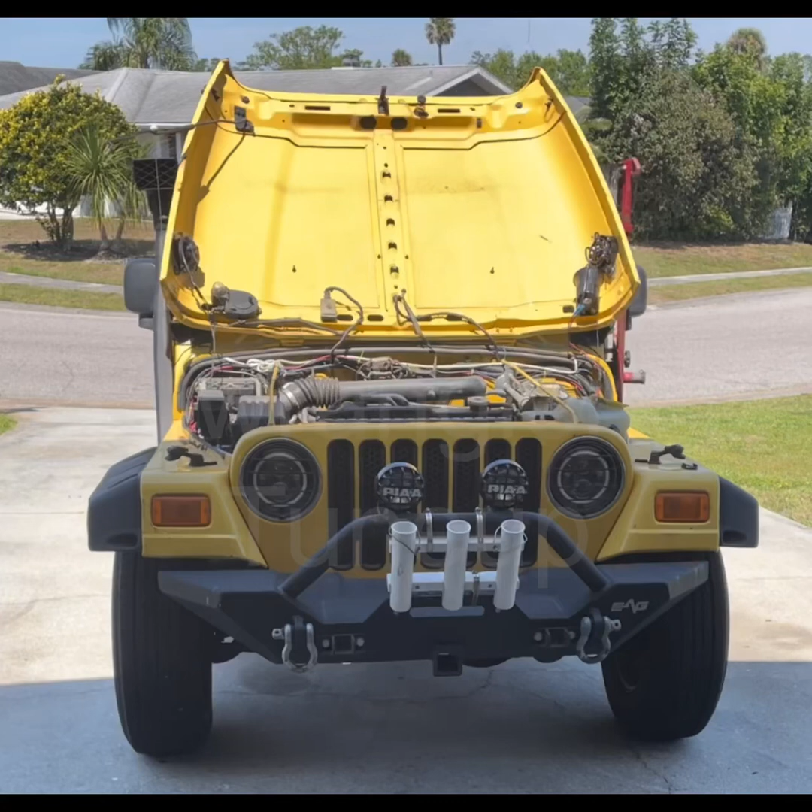Hey kids, how about we give the Jeep a tune-up today? My Jeep's a 2004 Jeep Wrangler. It's got the 4-liter inline 6. So we're gonna give it a tune-up. It's been running a little bit rough. It's been having some issues when it's hot.

When it's a hot temperature and I stop, run into the store, do something, and come back out, it starts real rough and coughs and spits and misfires. And I've done some research on the YouTube and whatnot, and apparently the primary issue is this. So as you can see here,

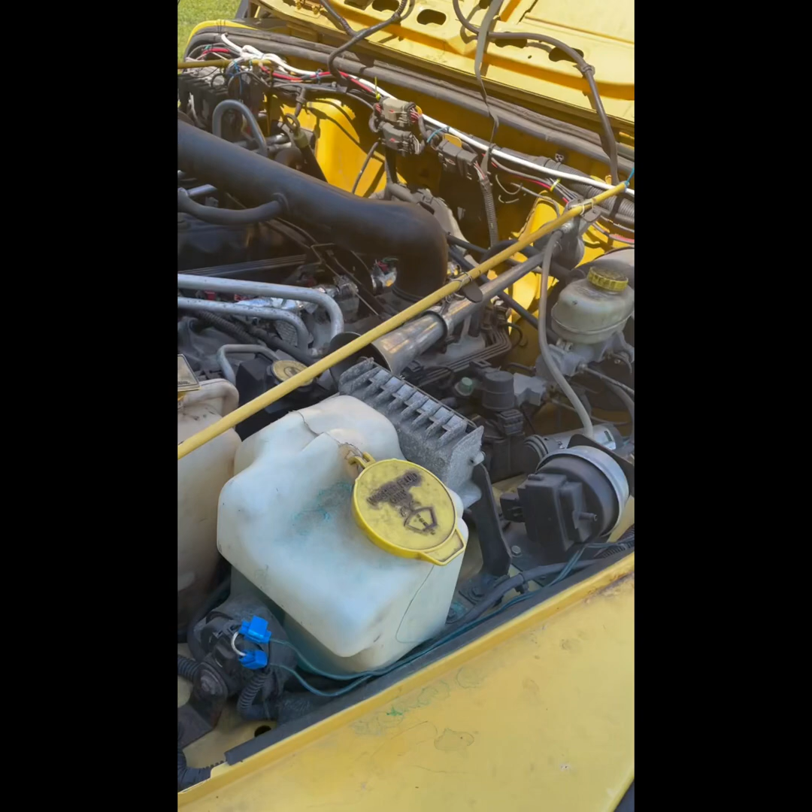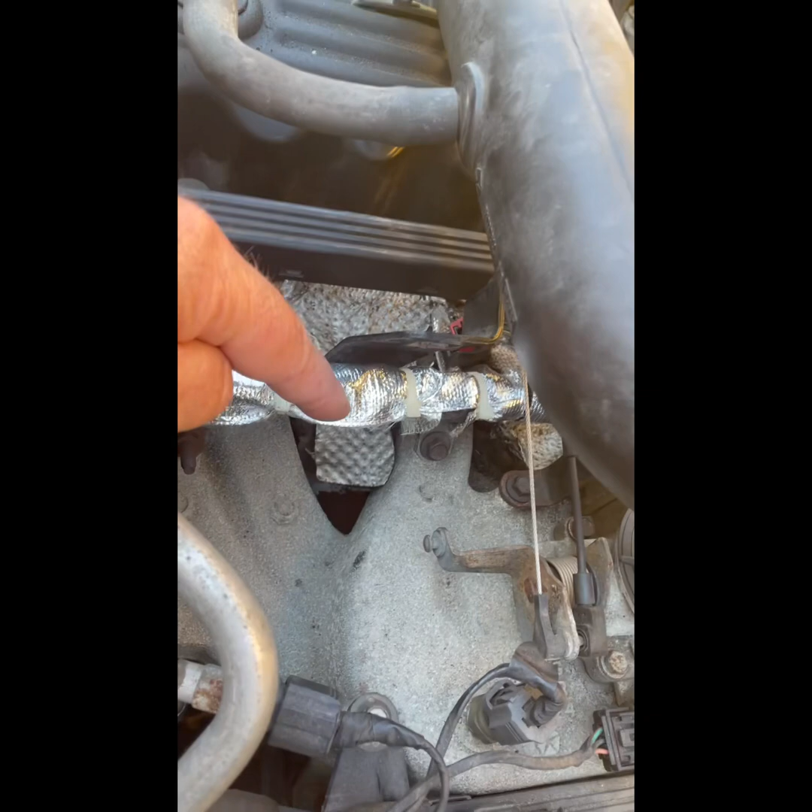this right here is your fuel rail, right? Runs fuel to each of the individual injectors. This is an injector here, and here, here, and there. These are all the injectors. Well, this is your exhaust manifold. Your exhaust manifold right here next to 3 and 4

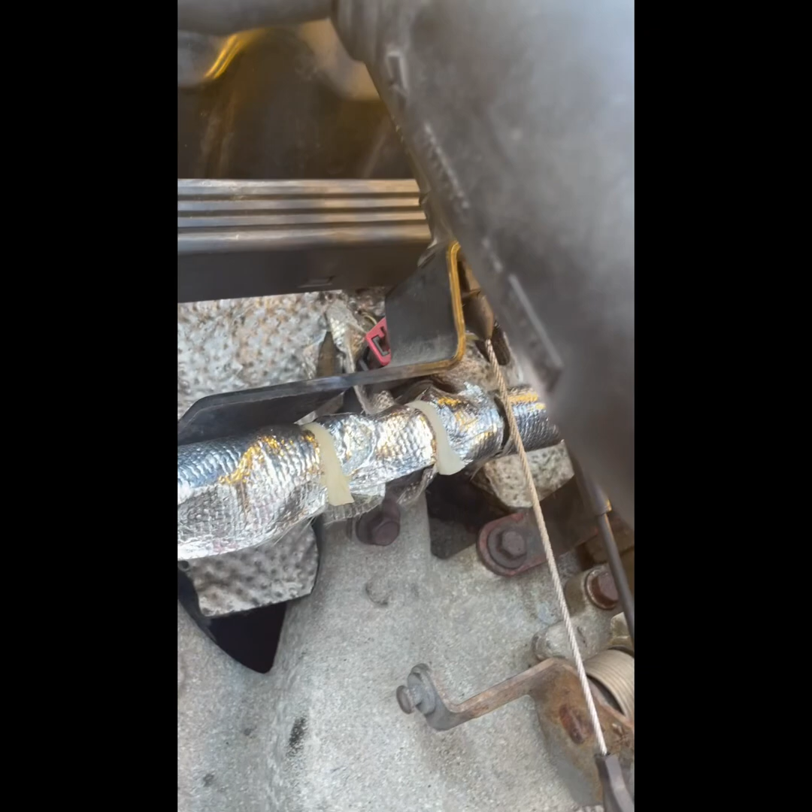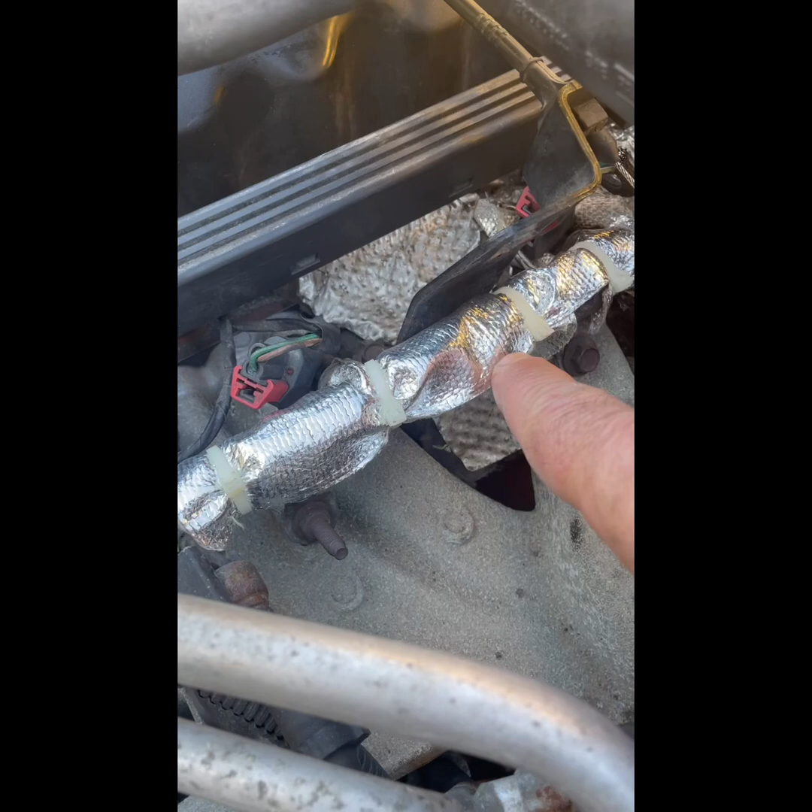are so wrapped around the exhaust manifold that it causes the fuel to vaporize while it's sitting in a parking lot. And what I've tried to do here recently is I bought this heat shielding, and it seems to be working pretty good. This is the original factory heat shielding, this little cheesy foil concoction that's just worthless.

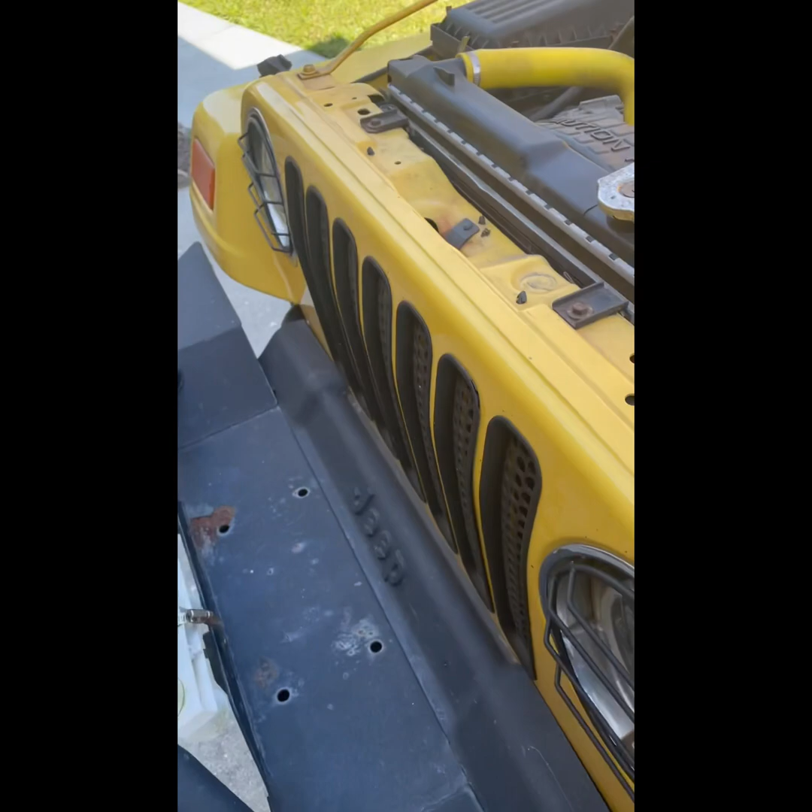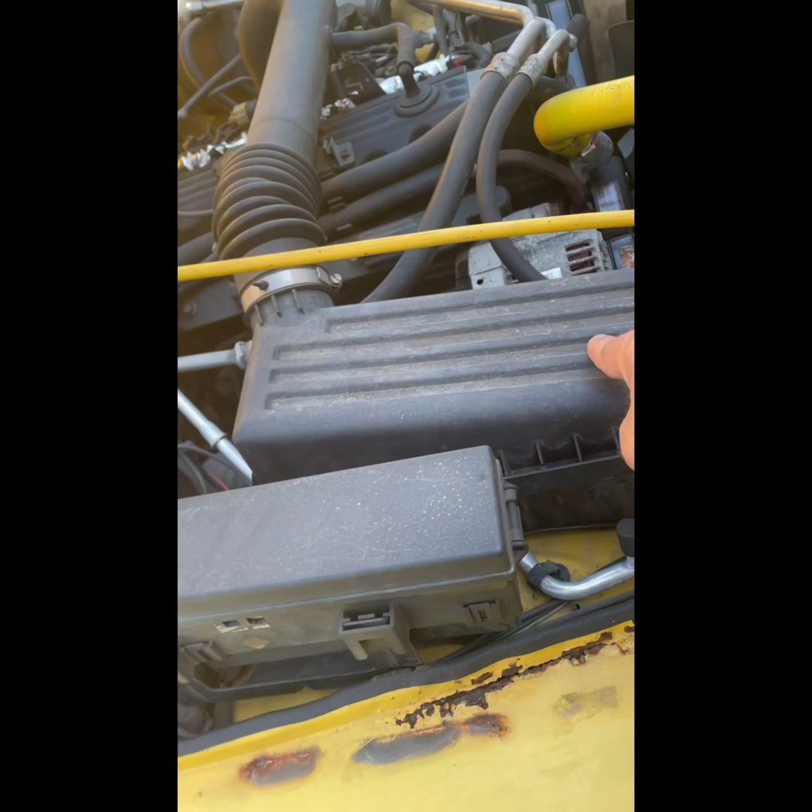So, like I said, we're gonna give it a tune-up. We're gonna be taking this guy here out. This is the ignition coil. We're gonna take that out. We're gonna replace that, and then underneath that are the spark plugs. We're gonna replace those. We're also gonna clean out our air filter. We have a lifetime air filter that just needs to be washed and cleaned. We're gonna clean the engine bay out and basically give the old Jeep a spa day.

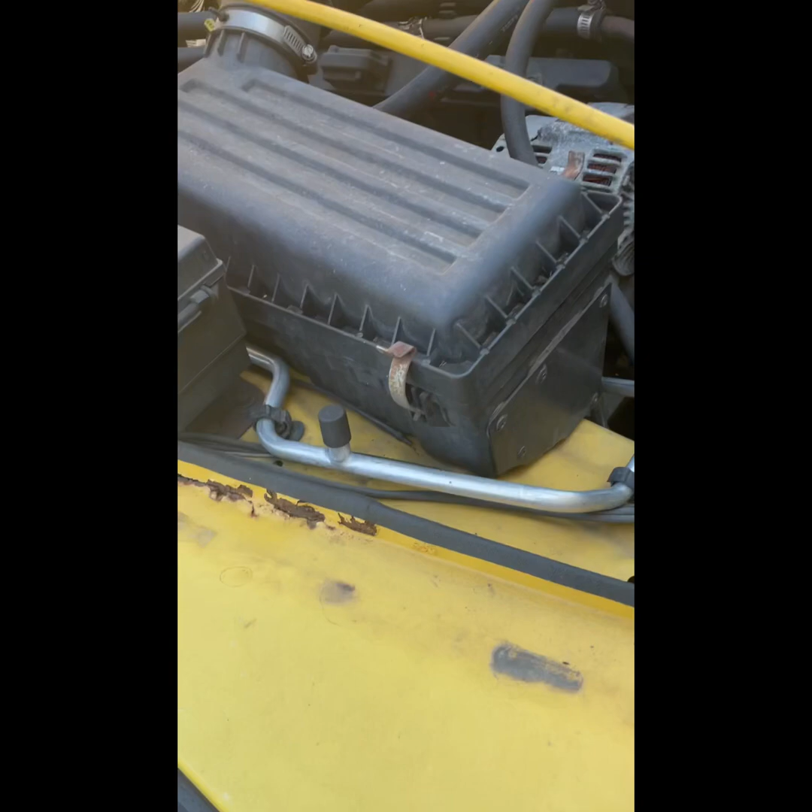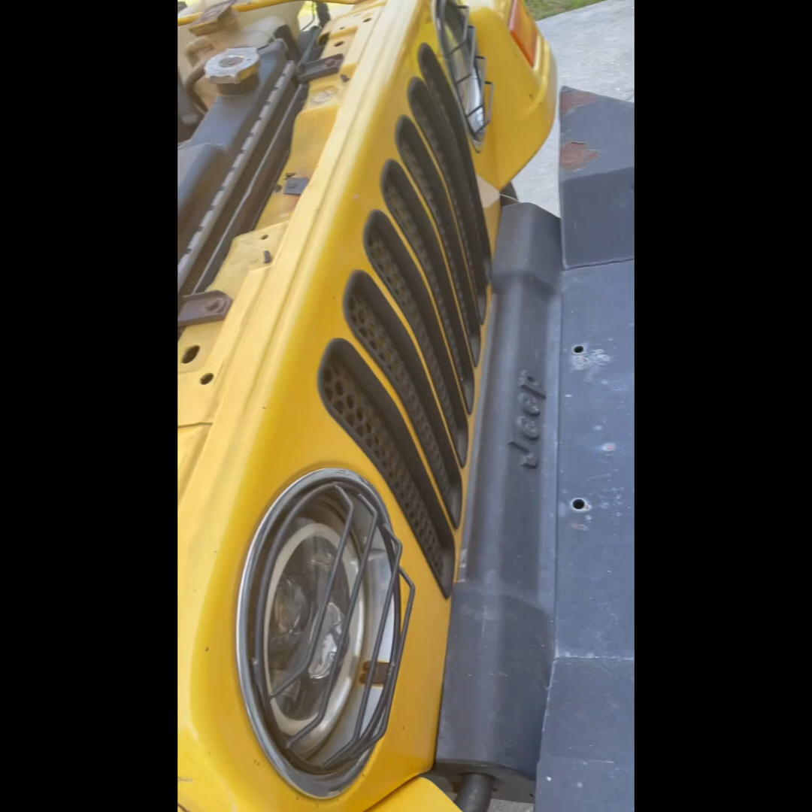Yeah, I've got some cancer here I gotta deal with, but it was there when I bought it. This Jeep originally lived in Boston, up in Boston. And so they like to use salt on their roads, so there's a little bit of cancer up in here. There's some more over here that I need to deal with. Right here under the passenger door. I gotta deal with that, but that's another episode.

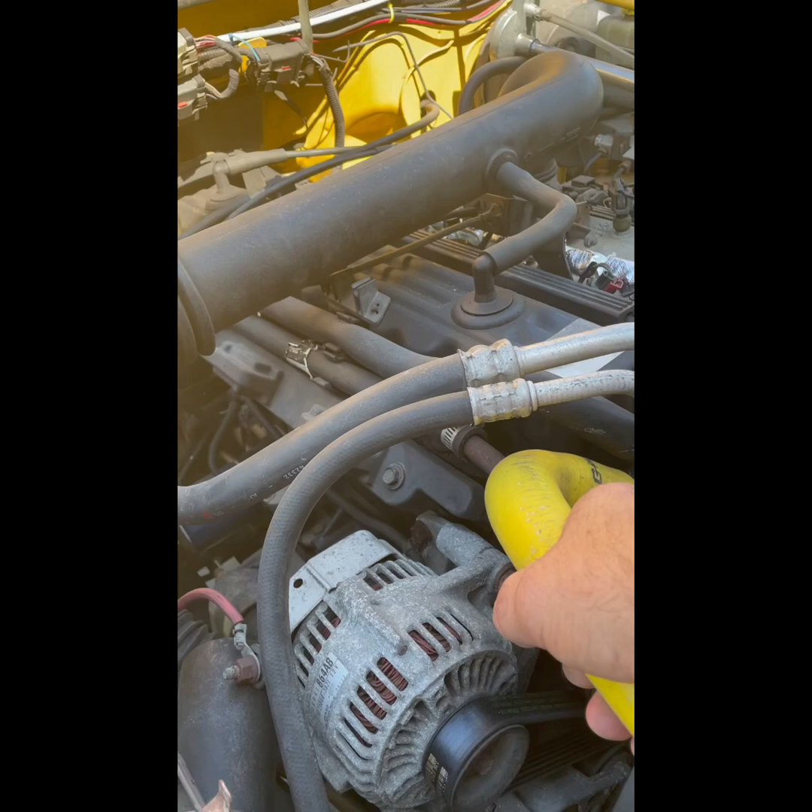So I ran to the store about 2 hours ago. Still pretty warm. We're gonna let this cool off for another hour with the lid open, and we'll be back. So here are our parts. Got a brand new OEM ignition coil. We've got Champion spark plugs, gap checker, and we've got this guy here.

This kit is a heat insulating system for the fuel rail that this company, Design Engineering, puts out. And I've read nothing but good reviews, and it was not horribly expensive. I'll put the price, what I paid for it, in the comments. But here's our parts, here's our instructions, and we're gonna get started here.

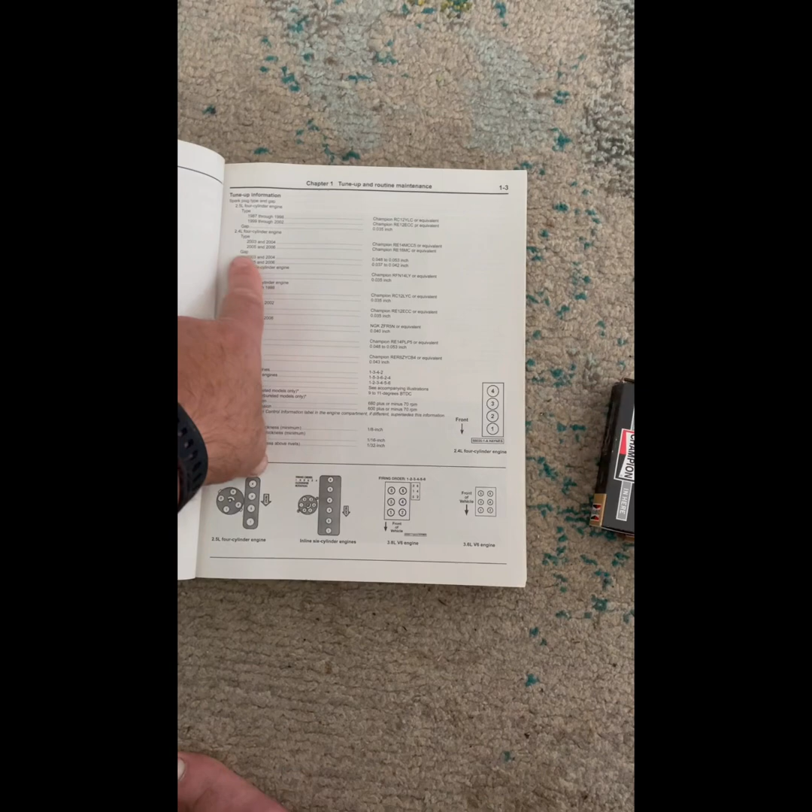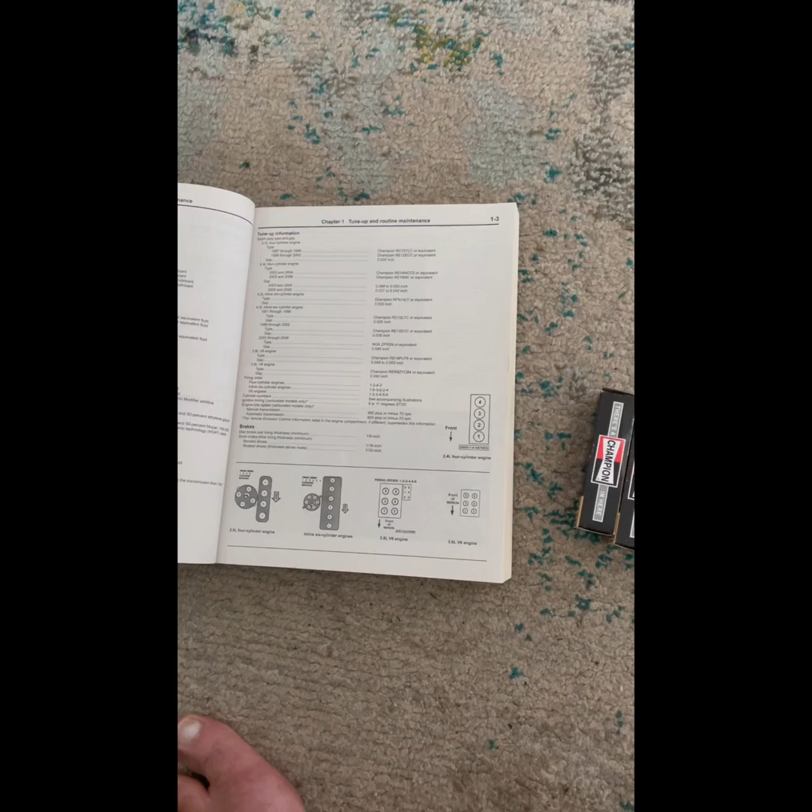Now, of course, as always, before we start, we always refer to the Haynes manual. Yes, sir? Then we're gonna turn here, we're gonna find our engine, we're gonna find our numbers, we're gonna see what kind of spark plug we need. Then we're gonna ignore that. I'm just kidding. We're gonna take that number, we're gonna cross-reference it, we're gonna Google things up, we're gonna YouTube things up, we're gonna find out that what works best in our Jeep is the Champion Iridium.

Champion Iridium 9034, the RC12WEPB5. Now, we're going to go to the Champion website and we're going to check things out. As we saw, the gap for this spark plug in this Jeep is 0.035.

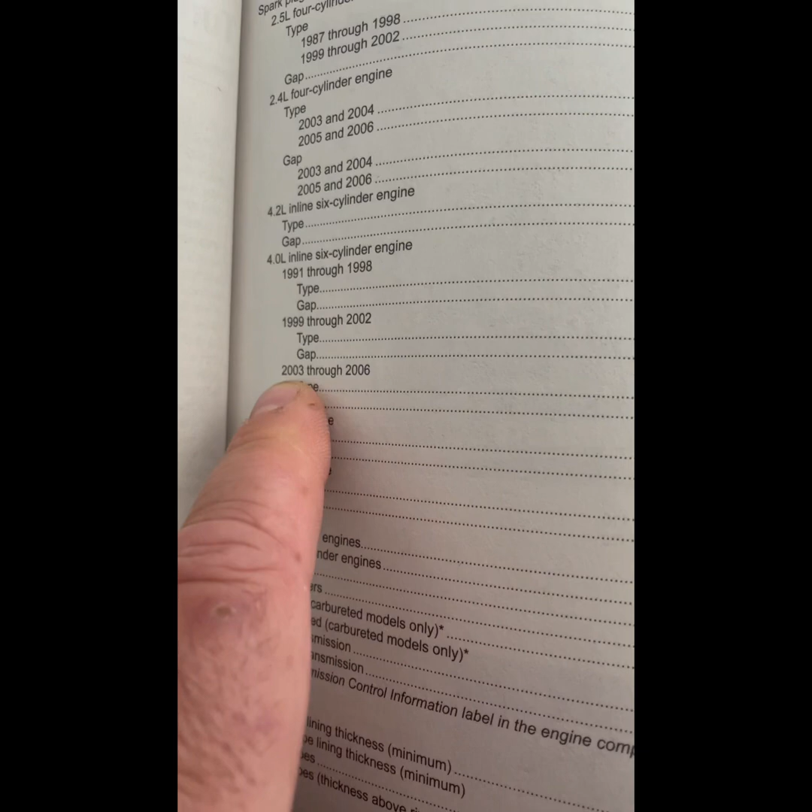Now in here, for the 4-liter 6-cylinder, 03 to 06, ours is an 04. It calls for a .04 gap. But as we saw, Champion wants us to put it at .035. So we're going to do that right now. We're going to make sure that we have the proper gap on our spark plugs.

How we do that is with one of these. It's a gap checker, right? We're going to go here. We're going to check them. That's where we want to be. Yeah. We want it just where it stops. Oh, we're a little big. Just a little big. We want .035. Still a little big.

That's perfect, .035. But what we're going to do is we're going to do that with all the rest of the spark plugs before we even get started. Alright, now here's a prime example of why you always check and don't assume that your spark plugs come out of the box at the proper gap. As you saw, the first one was around .040 and we want .035.

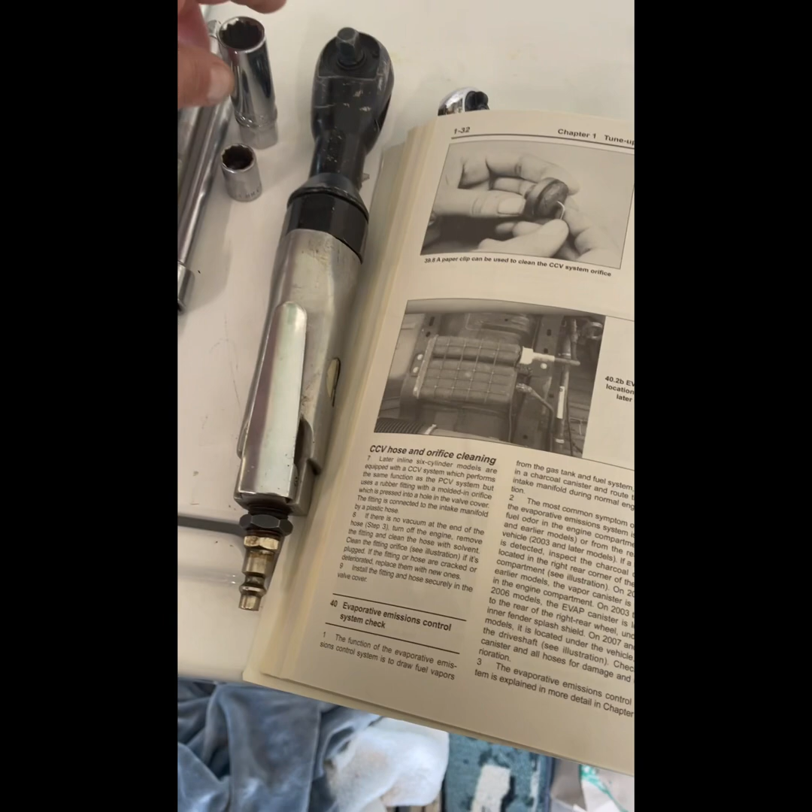There. All right, so we've got the stage set here. We've got our new coil, our spark plugs. This is our spark plug gap checker. We got our heat shield kit. We've got some extensions, air ratchet. We got 1/2 inch, and we've got a 5/8 spark plug socket. We've got some gloves, keep our mitts clean, and our instructions. Got a fan. It's kind of warm today. And we've got a Jeep.

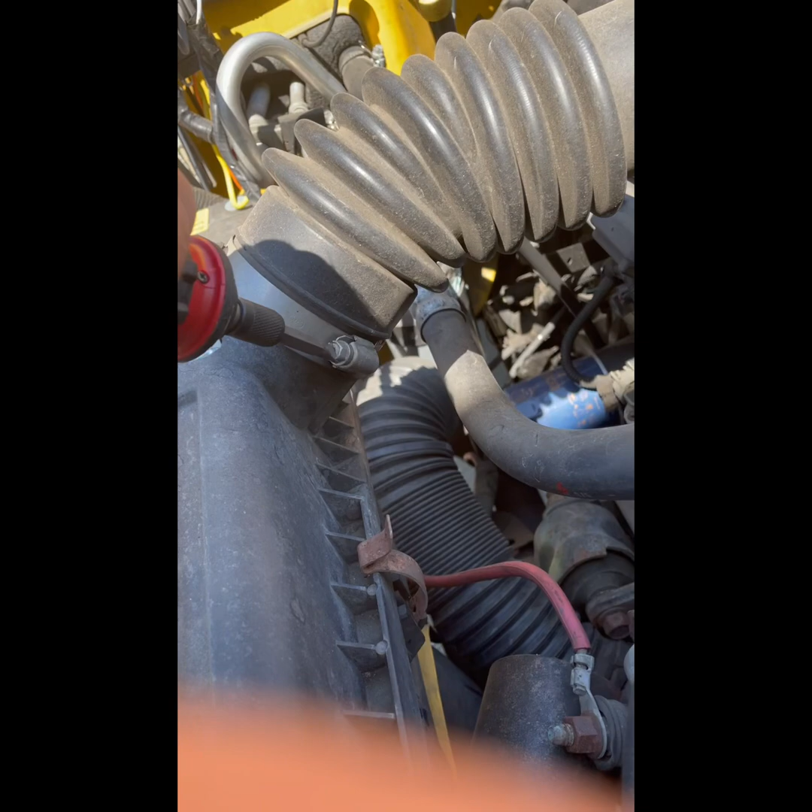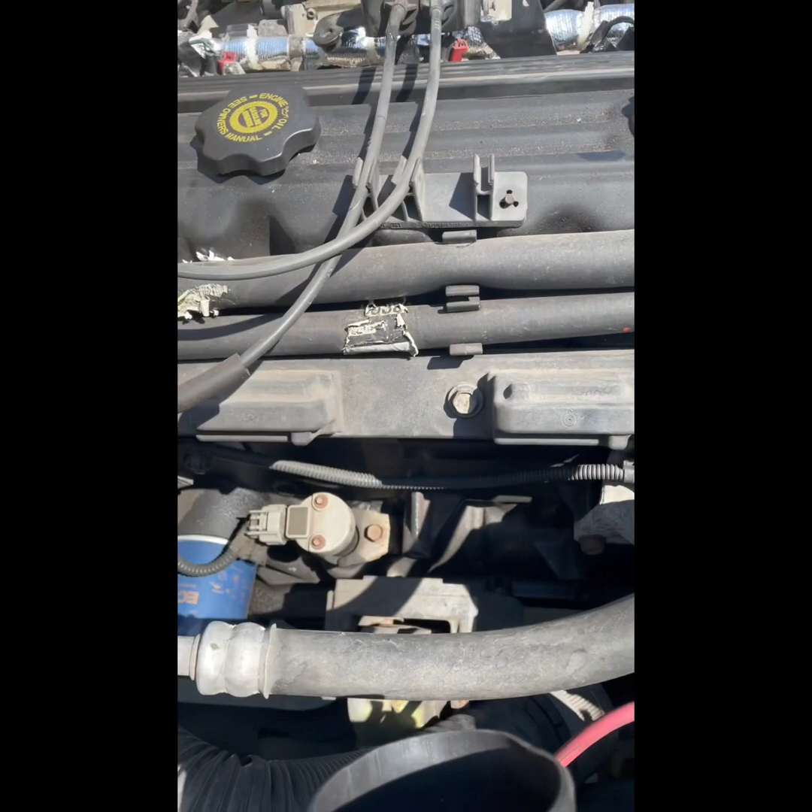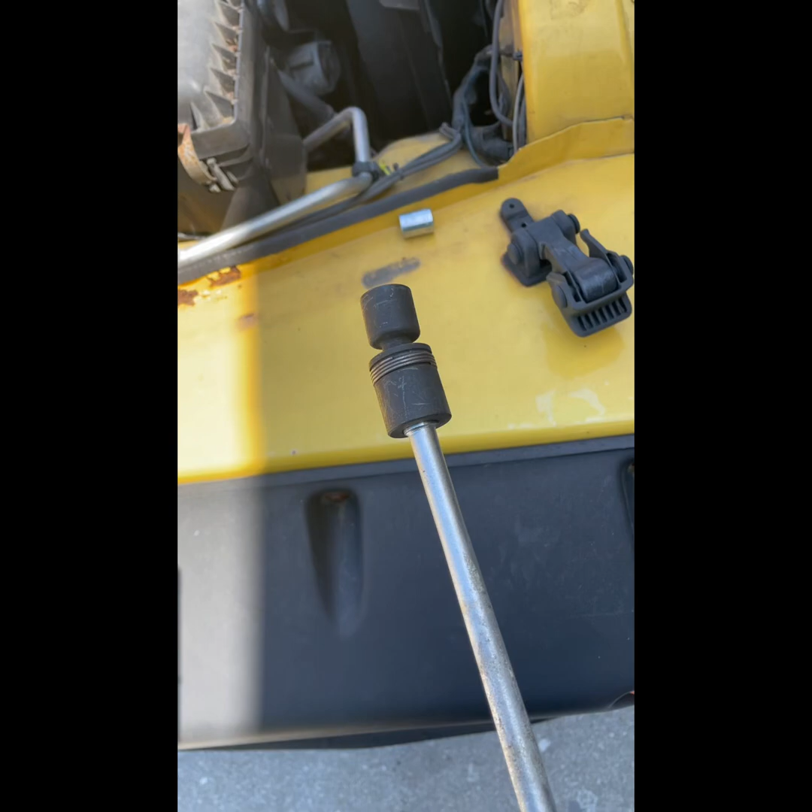Let's get started. First thing we're going to do is we're going to take this air hose off. We're going to be cleaning the air filter also. So just to get this out of the way here, we'll pull this. Always oil your air tools. So step one is we're going to remove these 1/2 inch retaining bolts from the old ignition coil. I couldn't remember the word. Every once in a while you get to use the cool tools at this wobble bay, that back corner one.

And then it comes out pretty darn easy, except it's got a really interesting electrical connection, and we need to go to the manual to see what the code is for pulling that out. I think you got to hold your tongue just right, and you got to stand on one leg.

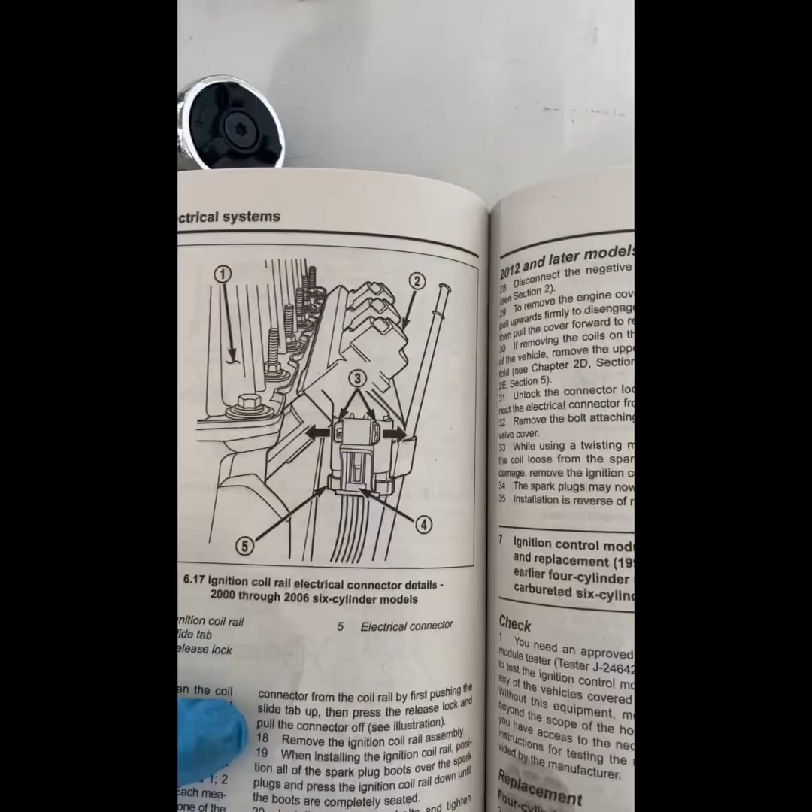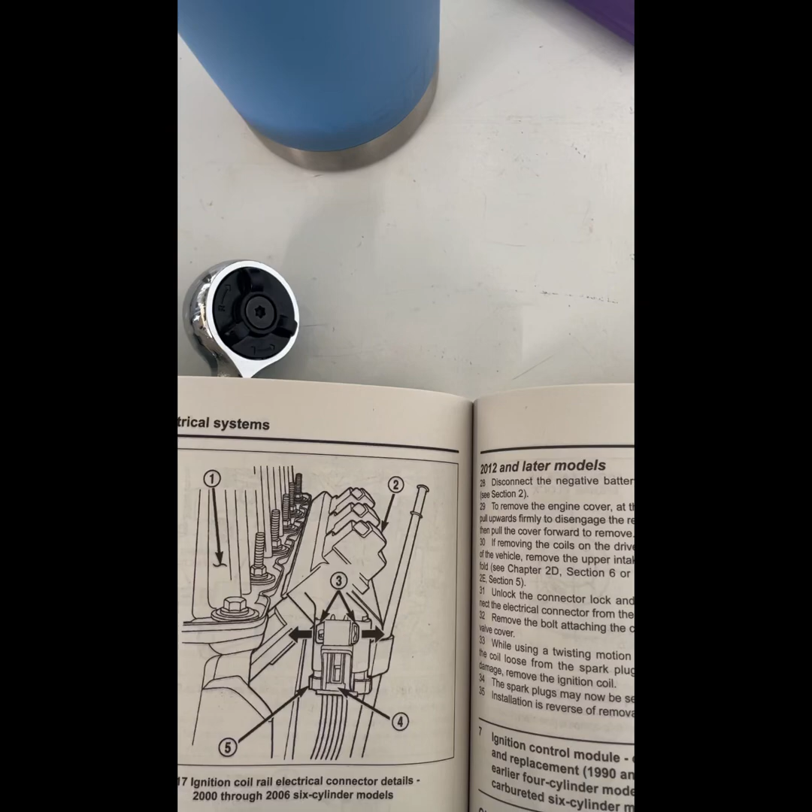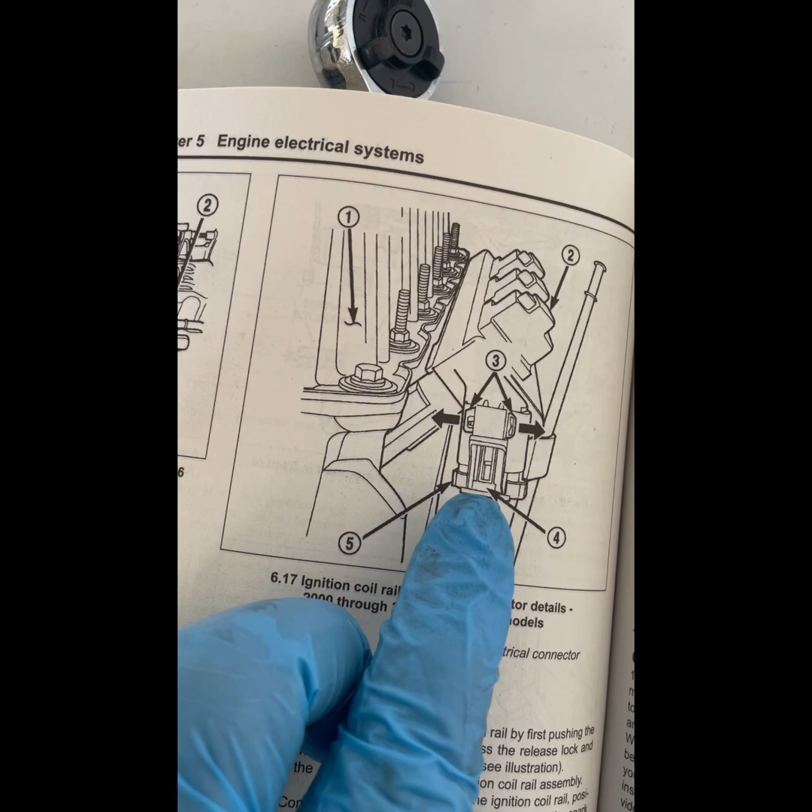Disconnect the electrical connector from the coil rail by first pushing the slide tab up. Slide tab up. Then press the release lock and pull the connector off. Release lock. So up and up. And there it is. Out. That clip's kind of a bear to get, but once you get it, it slides right out.

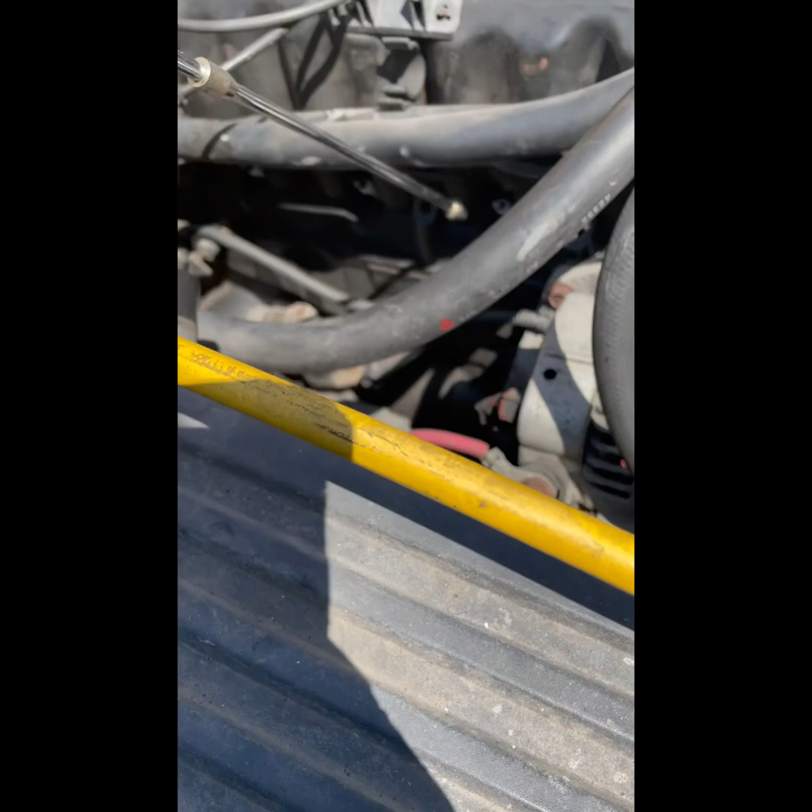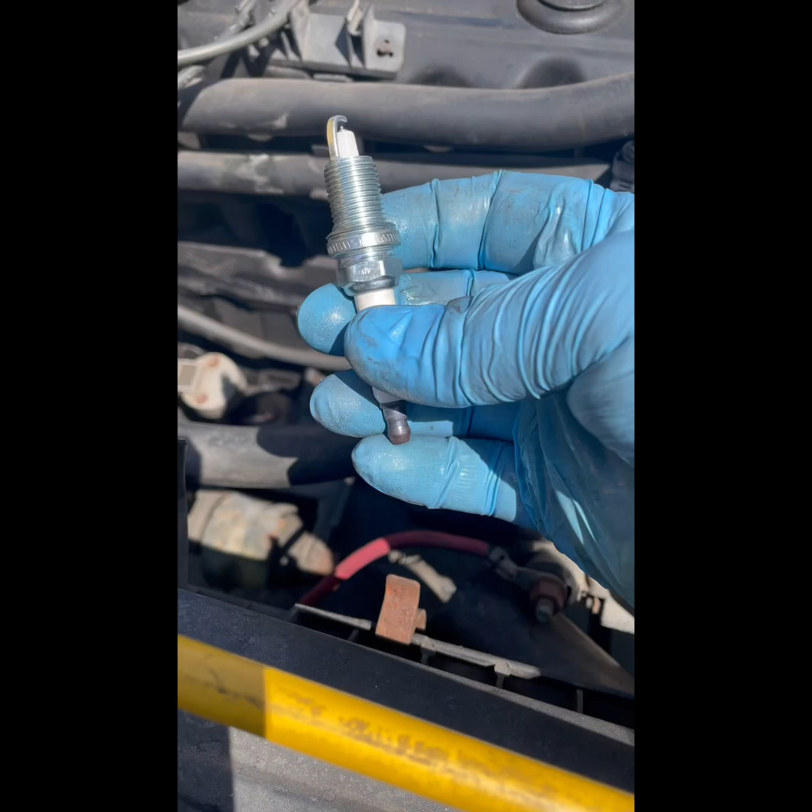So before we go pulling these plugs, I'm just going to clean everything out with some air. Make sure I don't get anything in anywhere that doesn't need to be. I'm going to take a little dab of engine oil, motor oil, and put it on all the threads as an anti-seize measure. Alright, so now we're going to put all the spark plugs in by hand first. We're going to screw them in as tight as we can, finger tight, before we put a wrench to them.

You never, ever, ever want to go direct to your air tool or your sockets, because if you cross thread this, no good. All right, so in closing, get all your spark plugs in, hand tighten them. Then you torque them to 27 foot-pounds, and be careful, especially with that last one back against the firewall.

If you get a little bit of angle on your extension as you're tightening it, you can break a spark plug, break the porcelain. Not that that's ever happened to me, and had to go to the auto parts store and get a new spark plug. Anyway, so do that, and then

put your coil rail on. Make sure it's on each spark plug real nice. Clip the wire harness onto it. When you get the wire harness clipped on all the way to where you hear that little click, slide the lock tab over so that it's locked in. Put the bolts in, start them off by hand so that for sure they're threaded good, and you tighten those to 230 inch-pounds. 230 inch-pounds is about that tight.